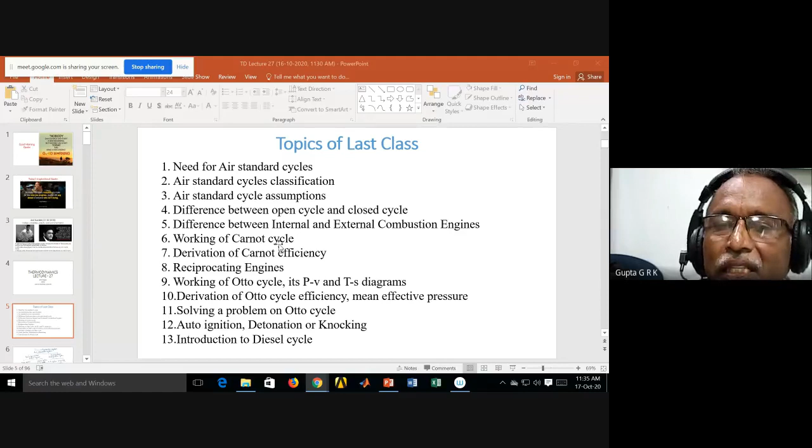We classified the air standard cycles into power cycles and refrigeration cycles. In the power cycles, we have gas cycles and vapor cycles. In the gas cycles, we have many cycles like the Otto cycle, diesel cycle, Brayton cycle, Stirling cycle, Ericsson cycle, Atkinson cycle, Lenoir cycle, and so on. These are various gas cycles.

So in power generation, we have gas cycles and then vapor cycles, which we have already discussed, that is the Rankine cycle. In refrigeration cycle, we have air cycle refrigeration and vapor cycles. In vapor cycles, we have vapor compression refrigeration system and vapor absorption refrigeration system. These things we will discuss in R&AC, but vapor compression refrigeration cycle has already been discussed in DME and also in thermodynamics.

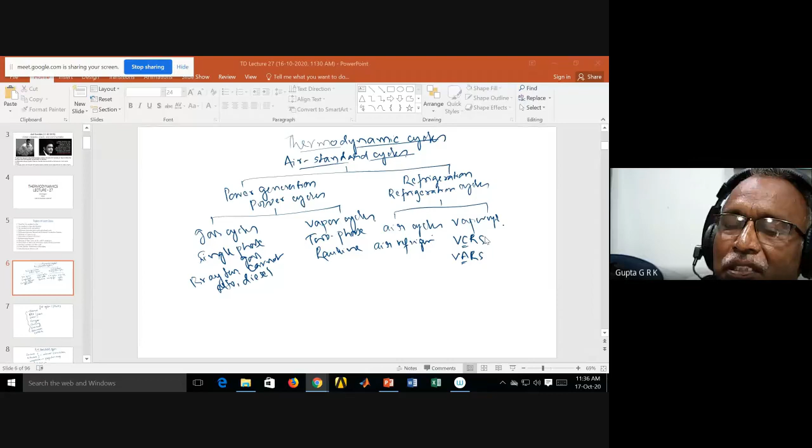So out of these gas cycles, why do we assume air standard cycles? Because there are a lot of problems in practical cycles which we cannot deal with in the early stages. Later, using CFD and other advanced computational technologies, we can analyze them. But for the simple theoretical things, we are happy with approximate solutions. So we make some assumptions.

What makes it complicated is the friction and turbulence, which are reasons for internal irreversibilities. Also composition changes, because combustion takes place inside, and there will be heat losses. So all these things we have to consider when we look at practical cycles, but we take some air standard cycle assumptions, some idealizations.

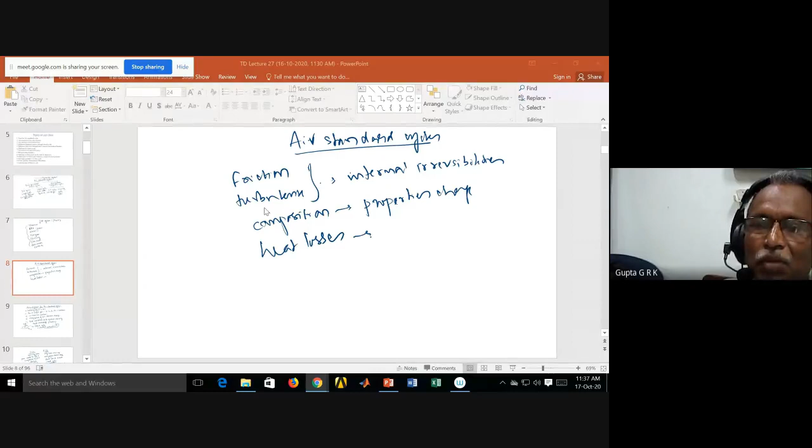So what are the assumptions for air standard cycles? Working fluid is air, and air is taken as a perfect gas, for which Cp, Cv, R, and molecular weight are all constants. We assume there is no chemical reaction, and the composition of air doesn't change. That's why combustion takes place outside, not inside the air. Its composition recirculates.

It is a closed cycle. That's what we call external combustion type, where combustion takes place somewhere else, but only heat is exchanged, from a high temperature reservoir. So this is a closed thermodynamic cycle.

But in reality, these are open cycles. We know that air is taken in and exhaust gases go out. That is an open cycle, where air is not recirculated, and new fresh air is taken in. So we discussed the difference between internal combustion and external combustion: here burning takes place inside the fluid, there burning takes place outside with only heat exchange. Here composition does not change for the working fluid, there composition changes. That's why it is open cycle versus closed cycle.

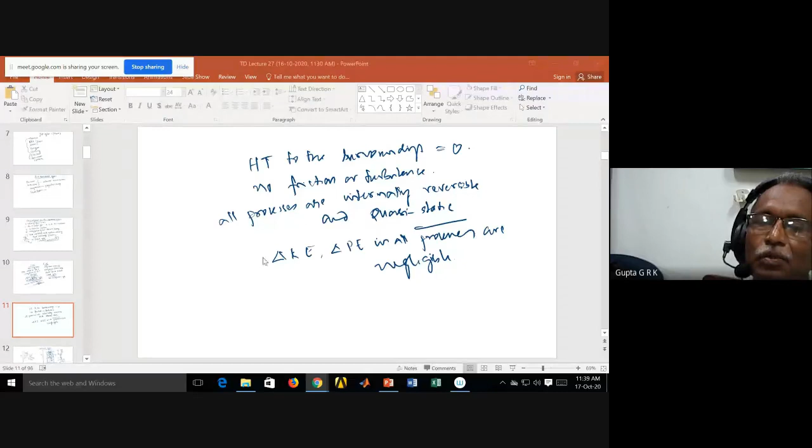Other assumptions include that heat transfer to the surroundings is zero, and there is no friction and turbulence, meaning we assume all the processes to be internally reversible and quasi-static. Also, we assume that change in kinetic energy and potential energy is negligible in all the processes.

So this is the way we have derived the Carnot efficiency. I told you we can do this in terms of pressure ratio, velocity ratio, volume ratio, and temperature ratio, as we have done in the previous chapter.

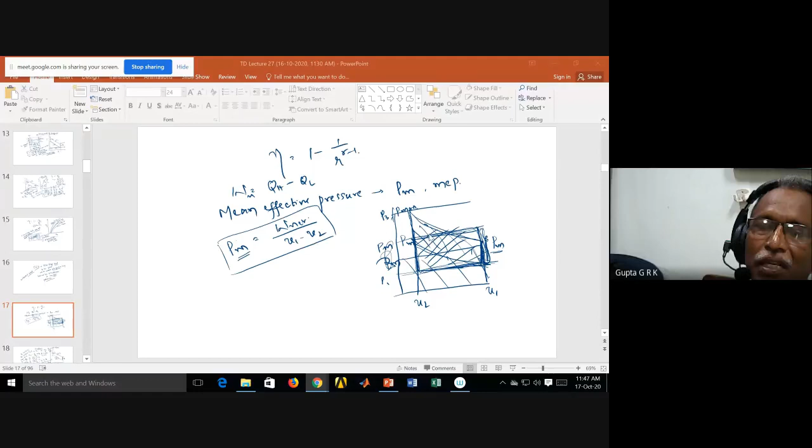This is the efficiency. We define what is called mean effective pressure: for the same distance of the piston, to have the same work, an equivalent pressure acting from beginning to end would produce this much work. That pressure is called the mean effective pressure, which, since area is W net by V1 minus V2, gives the height of the rectangle, which is the mean effective pressure. That is how we define mean effective pressure.

Now I told how to solve a problem of the Otto cycle. You will be given P1 and T1, and you will be given the compression ratio, so you can find V2 by V1. So V2 is obtained, the volume ratio is known, and you can find the pressure ratio and temperature ratio from isentropic relations.

Then you will be given either the maximum pressure or temperature, or you will be given the heat addition. If heat addition is given, constant volume heat addition: Cv into T3 minus T2 equals QH, so I can find T3. If T3 is given, you can find QH. In that way I can find P3, T3, and V3.

Coming here, I know that V4 equals V1. Since V4 is already known, V3 by V4 is known, so you can find T3 by T4 and P3 by P4 using the isentropic ratios again. In that way, I can find all the pressures, temperatures, and specific volumes.

Once I know all of them, I can find out what is the heat lost, what is the heat gain, what is the work done, and the efficiency. All these things I can find out. This is the way I can tackle a problem.

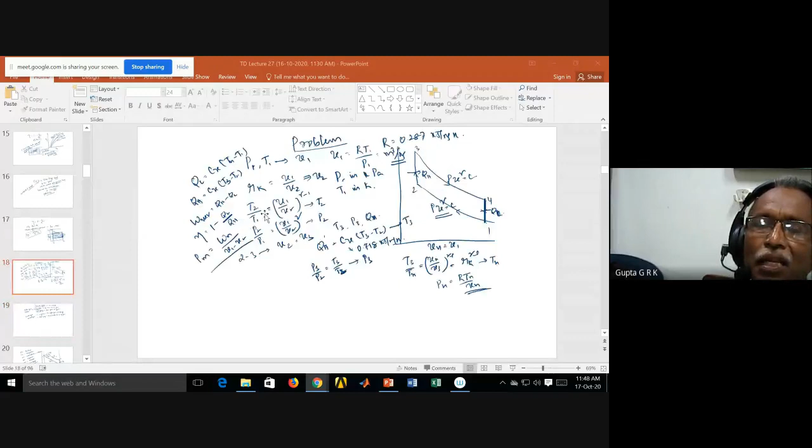If you want higher compression ratios to increase efficiency further, we go for what is called the diesel cycle, where only air gets into the cylinder during suction. It gets compressed. After compression, when the temperatures and pressures are high, we inject the fuel at still higher pressure so that combustion takes place. That is called CI engine, compression ignition.

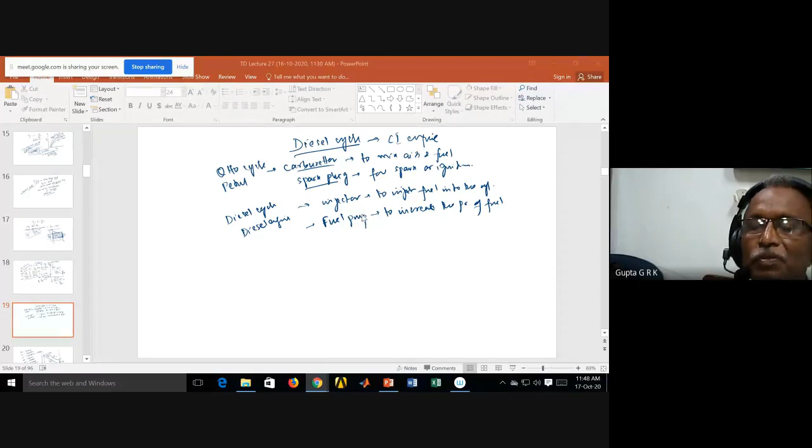Previously, Otto cycle or petrol engine is SI engine. So in Otto cycle, we will have a carburetor and spark plug. In diesel engine, we will have an injector and the fuel pump. So this is about the diesel engine.

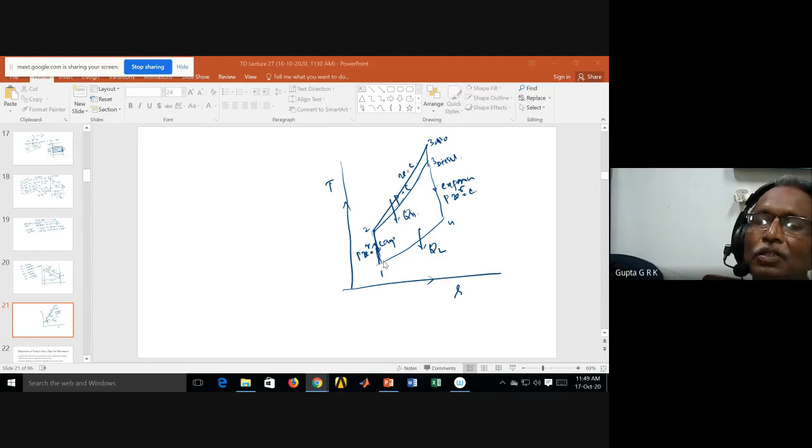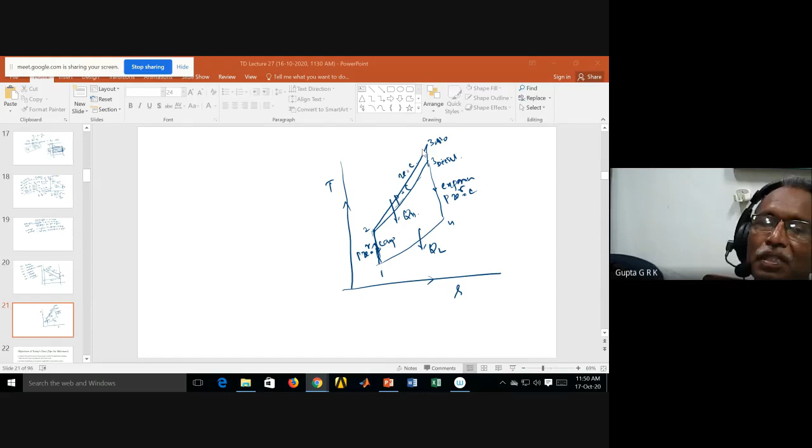If you draw the diesel cycle on a TS diagram, we get this: compression, then constant pressure combustion, then expansion, and the heat release. This is the way it takes place. If it is the Otto cycle, we will have constant volume combustion. You can see that the area of the cycle increases for the Otto cycle, because this has a higher slope. That's what we discussed in the last class.

Today's class we will continue, and derive the expression for diesel efficiency, the diesel cycle efficiency.

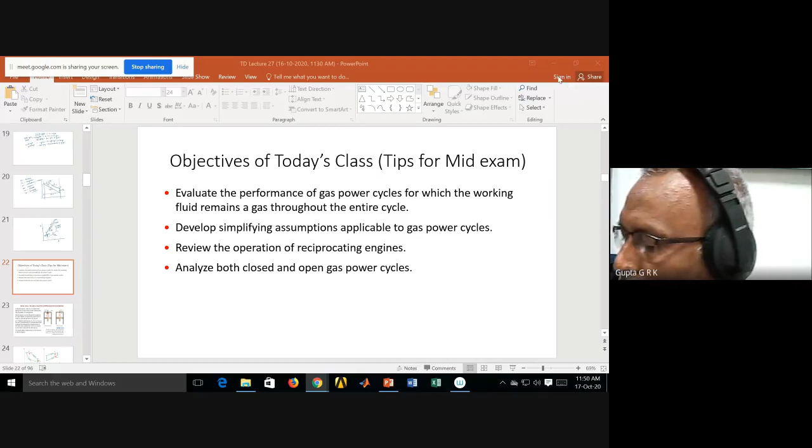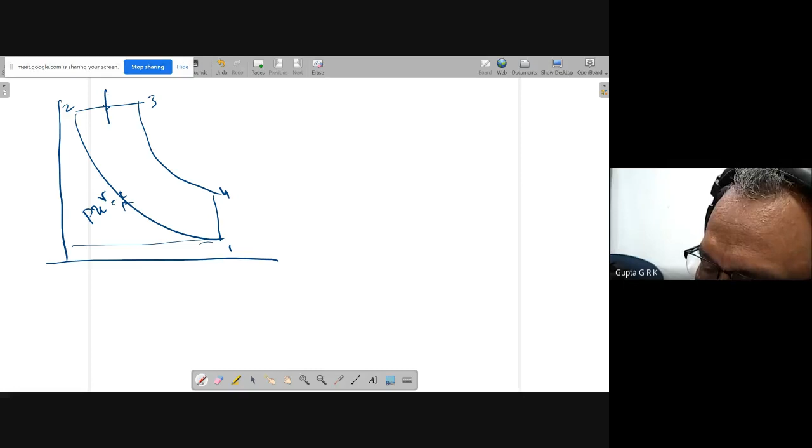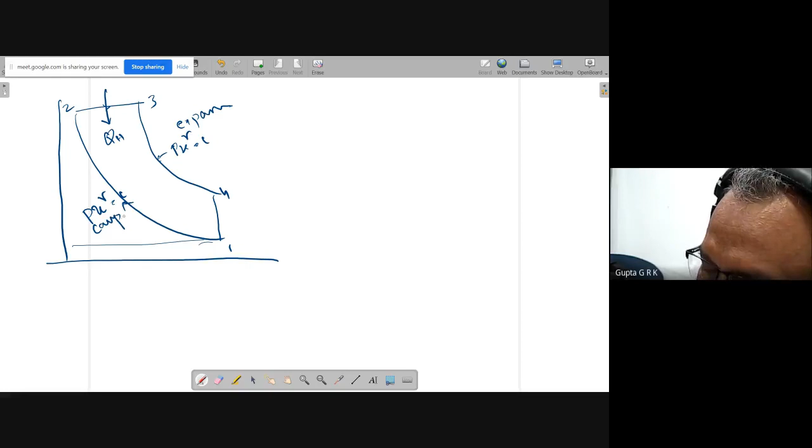So if you draw a diesel cycle, this is PV power gamma. I am not drawing the suction and exhaust strokes because this is a horizontal line, but even if you draw it, it's no problem. 2 to 3 is the combustion, QH, and this is the expansion stroke, PV power gamma equal to constant. This is compression, and 4 to 1 is the release, QL. So this is the cycle.

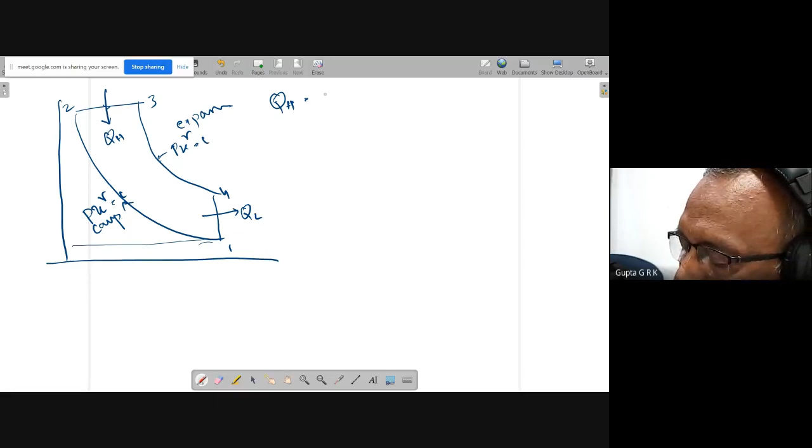So if we want QL and QH: QH is equal to, because this is constant pressure heat addition, Cp into T3 minus T2. And QL, because it is constant volume heat rejection, Cv into T4 minus T1. So efficiency is equal to 1 minus QL by QH, which equals 1 minus Cp into T3 minus T2 by Cv into T4 minus T1.

Cp by Cv is gamma, so I will write this as 1 minus T1 into T3 by T1 minus T2 by T1, all by gamma, times T1 into T4 by T1 minus 1. This T1 cancels off. So I want T3 by T1, T2 by T1, T4 by T1, all those things in terms of the parameters.

So the parameter V1 by V2 is equal to the compression ratio. That's why T2 by T1 is equal to V1 by V2 to the power of gamma minus 1, that is Rk power gamma minus 1.

And then there is another ratio defined, called the cutoff ratio, because it is cut off at point 3. So V3 by V2 is equal to Rc, this is called the cutoff ratio. From 3 to 4 it is expansion, so we write it as Re expansion ratio, V4 by V3. So this is cutoff.

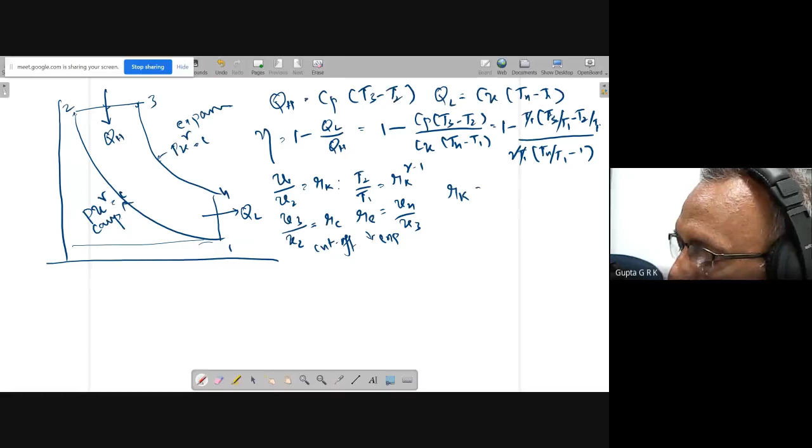This is expansion. So we define 3 ratios: compression ratio, V1 by V2; cutoff ratio, V3 by V2; and expansion ratio, V4 by V3. The total compression ratio is equal to the product of the cutoff ratio and expansion ratio, because the whole volume ratio equals the partial volume ratio times another partial volume ratio: Rk is equal to Rc into Re. Now I want to express them in terms of the temperature ratios.

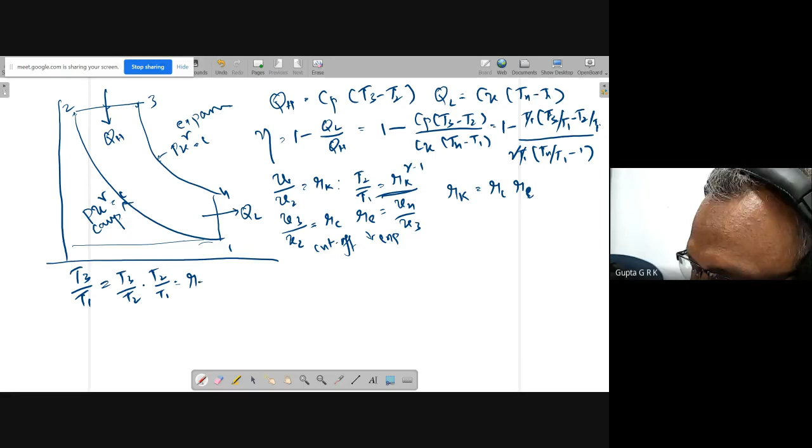So if you take T2 by T1, it is already Rk power gamma minus 1. If I want T3 by T1, it is equal to T3 by T2 into T2 by T1. So T3 by T2 is V3 by V2, and V3 by V2 is Rc, and T2 by T1 is Rk power gamma minus 1.

So I write like this. And I want T4 by T1. So T4 by T1 is equal to T4 by T3 into T3 by T1. And T4 by T3 is V3 by V4 to the power of gamma minus 1. So V3 by V4 is 1 by Re, to the power of gamma minus 1.

And Re is equal to Rk by Rc. So I substitute that, so this is equal to Rc by Rk to the power of gamma minus 1, into Rc, Rk power gamma minus 1. So you can see that Rk power gamma minus 1 and Rk power gamma minus 1 goes off, and Rc power gamma minus 1 into Rc is equal to Rc power gamma.

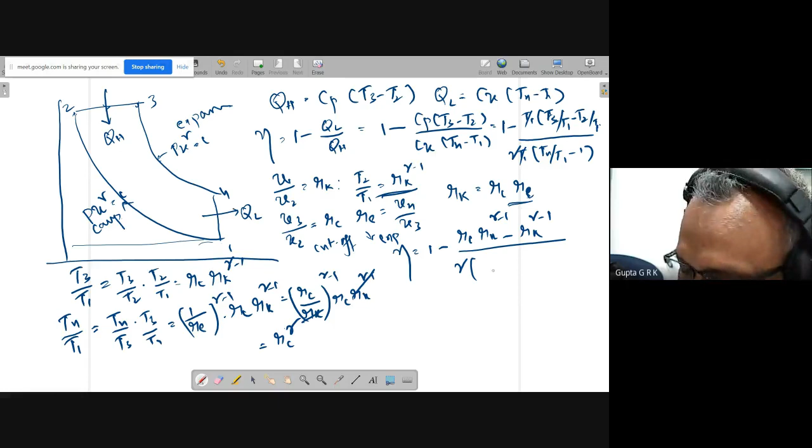Okay, so all these things I get, I substitute there. So eta is equal to 1 minus T3 by T1, which is Rc, Rk power gamma minus 1, minus T2 by T1, which is Rk power gamma minus 1, by gamma. T4 by T1 is Rc power gamma, minus 1. Like this we get.

Sir, gamma should be in the numerator? Gamma should be in the denominator only. Cp in the numerator, Cv in denominator. No, I've written it wrong actually, everything is wrong, I have done it in reverse. Actually QL by QH, 1 minus QL by QH, I have written QH by QL, it becomes reverse, sorry.

So it will become 1 minus gamma into Rc power gamma minus 1 by Rc, Rk power gamma minus 1, minus Rk power gamma minus 1. Actually this is inversed, okay, I have written QL by QH here, but when writing QH, I have given it in the numerator and QL in the denominator. Sir, is it okay, gamma should be in denominator? Gamma should be in the denominator. Okay, this is how it happens.

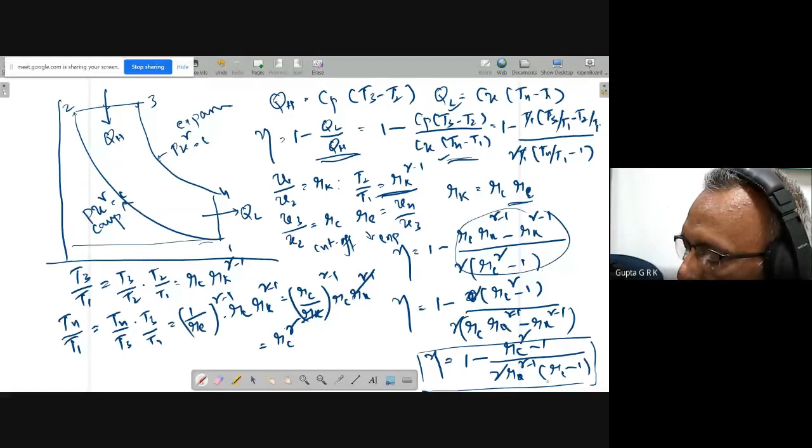So this eta is equal to 1 minus Rc power gamma minus 1 by gamma Rk power gamma minus 1, if I take common, into Rc minus 1. Okay, this is the efficiency. Eta is equal to 1 minus Rc power gamma minus 1 by gamma Rk power gamma minus 1 into Rc minus 1. Okay, this is the efficiency of diesel cycle. I will write again.

So this is the efficiency of the diesel cycle. And again, here also you can find out the mean effective pressure. Mean effective pressure is equal to W net by V1 minus V2. And W net is equal to QH minus QL. Okay, it is only a formula. If somebody asks you to derive, you have to derive it.

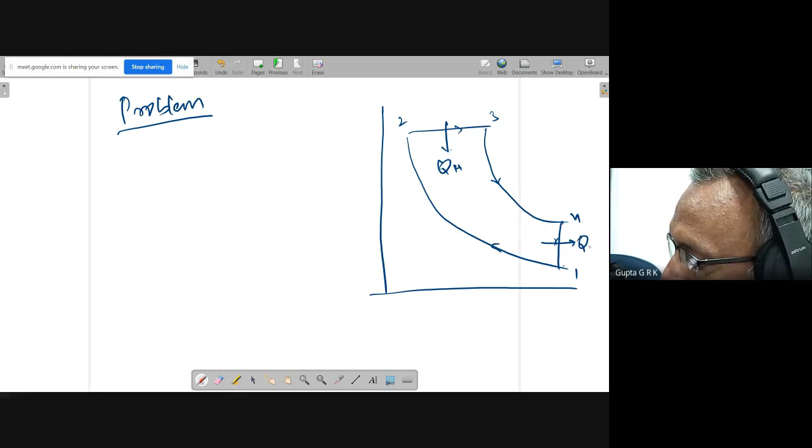Otherwise, you don't need to remember the formula. Only you have to do is just go point to point and find out pressure, volume, and temperature, and find out QH, QL, and W net, like this. So just for example, if you are given a problem, okay, you will be given P1 and T1, so you can find out V1.

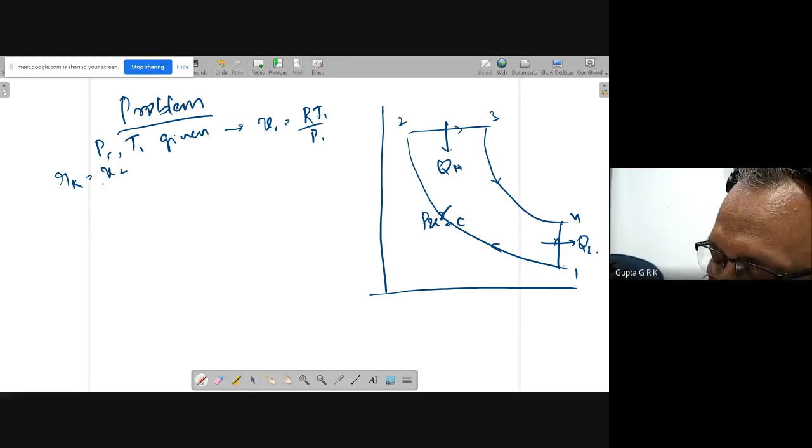Okay, and to get point 2, I know the process, so you'll be given compression ratio, that is equal to V1 by V2, which gives me V2. Okay, this is given again, so V2 I got. So T2 by T1 is equal to Rk to the power of gamma minus 1, and P2 by P1 is equal to Rk to the power of gamma. So I can find out T2. So all the values at point 2 I got.

So for getting point 3, again, you may be given cutoff ratio. If cutoff ratio is given, I can get which is called V3 by V2, so from V2 I can get V3. And once you get V3, then you can get V3 by T3 is equal to V2 by T2.

Because it is a constant pressure relation, I can get T3 from here. And anyhow, P2 equal to P3, so I know all the values. Once I know, I can find out QH. QH is equal to Cp into T3 minus T2.

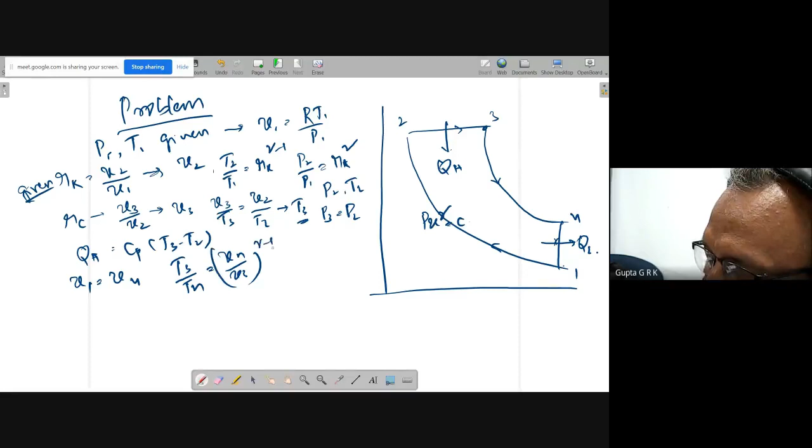And then I have to get point 4. So anyhow, V1 equal to V4, I know it. And so I know V3 and V4. V3 already calculated, V4 is known. So from 3 to 4, I can get T3 by T4 is equal to V4 by V3 to the power of gamma minus 1. This gives me T4. So I got all the temperatures, and so QL is equal to Cv into T4 minus T1.

So I got QH, QL, so W net is equal to QH minus QL. And efficiency is equal to 1 minus QL by QH, and mean effective pressure is equal to W net by V1 minus V2. So in this way, I can finish the problem.

Any questions? Data may be given in different ways sometimes. Here, instead of compression ratio, I may be given what is the maximum pressure after the compression, so P2 may be given. And from that, I have to find out P2 by P1, which gives T2 by T1 and V2 by V1 again from the isentropic ratios.

So like that, here also QH may be given to you instead of cutoff ratio. So if QH is given, first you calculate T3, and then this ratio T3 by T2 will give me pressure ratio and volume ratio. So that is the way I have to go about based on the data of the problem. Any doubts?

Just go point by point, get all P1, V1, T1, P2, V2, T2, P3, V3, T3, like that. First you understand that, how to get them, and then you can get all QH, QL, W net, efficiency, and mean effective pressure. Is that okay?

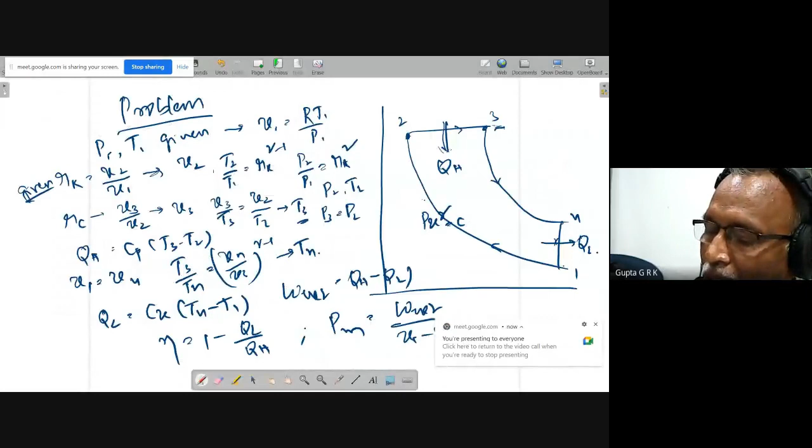Okay, then actually, if you see the practical cycles, mainly for diesel cycle, diesel engine.

So normally what we do is, we don't inject the fuel after the compression, because there will be what is called as injection delay. So if I start injecting after the compression, because it takes some time, and the combustion starts late, and I lose the power stroke. So because of that, we start injecting the fuel before compression is completed. But not too much early, because again the combustion may take place and it may obstruct the piston motion. So there will be a calculated amount of early injection I do.

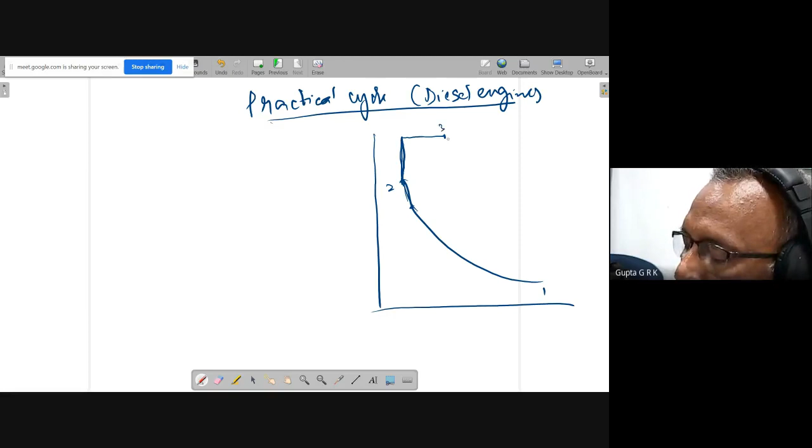So what happens is, I start injecting fuel here itself, so that the combustion takes place exactly like Otto cycle, it starts here. So this is 1 and this is 2. Some part there will be constant volume combustion, and it is injected further up to some point, cutoff. So this is constant pressure combustion.

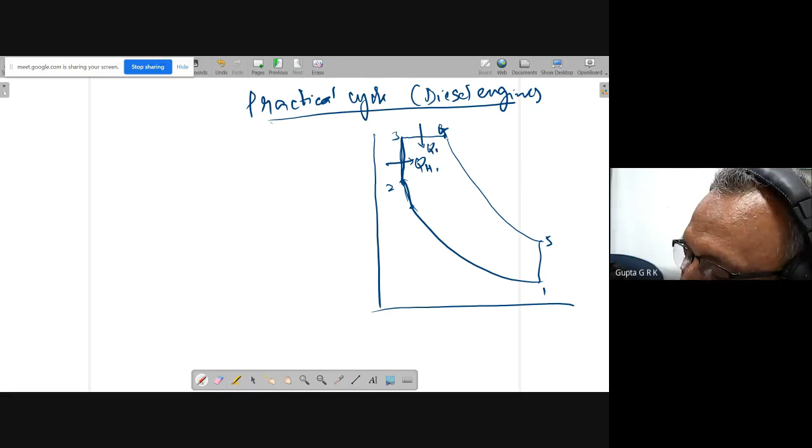There will be both constant volume combustion and constant pressure combustion, and the remaining thing will be same. This is 3 I will put, and 4 I will put here, 5. So this is QH1 and this is QH2, and this is QL. So this is the way. This is called as, there are different names for this: dual cycle, sometimes people call it limited pressure cycle, and some more people call it mixed cycle.

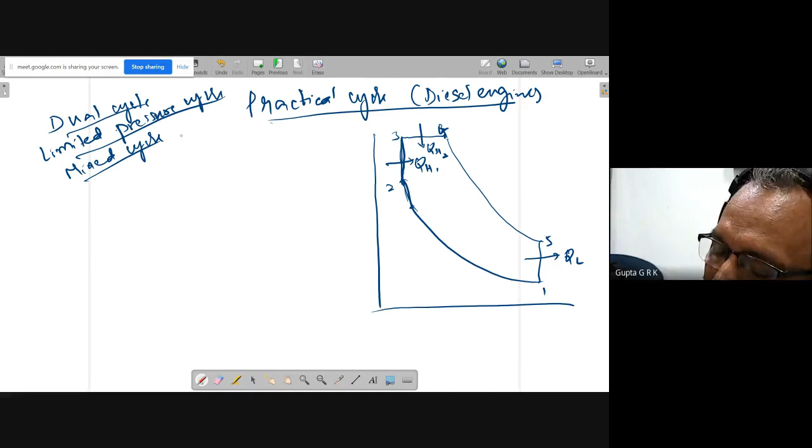All of them mean the same. And normally all high-speed diesel engines follow dual cycle. So this is the practical cycle, and we have constant pressure combustion partially and constant volume combustion, both of them partially. So there will be heat addition in the constant volume and then in constant pressure. The remaining things same: we will have suction stroke, compression stroke, and constant volume combustion, constant pressure combustion, then expansion, and then release, and then exhaust, like this. Okay, this is the way it takes place.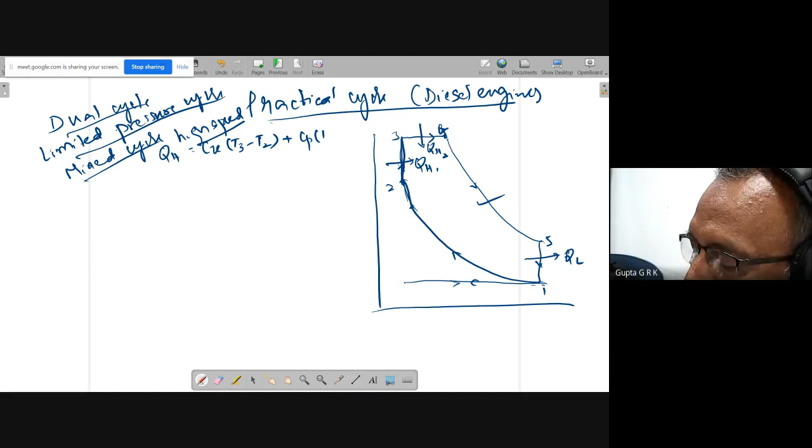And so we will have QH. Suppose if you take QH, this is equal to, first here, constant volume combustion, I will have Cv into T3 minus T2, plus Cp into T4 minus T3. And QL will be again constant volume release, so Cv into T5 minus T1. So this is 5.

So now again, eta equal to 1 minus QL by QH. So that is 1 minus Cv into T5 minus T1 by Cv into T3 minus T2 plus Cp into T4 minus T3, like this. So again, we do the same exercise as we have done. So Cv here gets cancelled, and here I will put gamma by dividing Cv in both numerator and denominator. And again, I can divide both numerator and denominator by T1. So 1 minus T5 by T1 minus 1 by T3 by T1 minus T2 by T1 plus gamma into T4 by T1 minus T3 by T1. Okay, so this is the way.

And same way we'll do T2 by T1. We know that this is Rk to the power gamma minus 1, where Rk is V1 by V2.

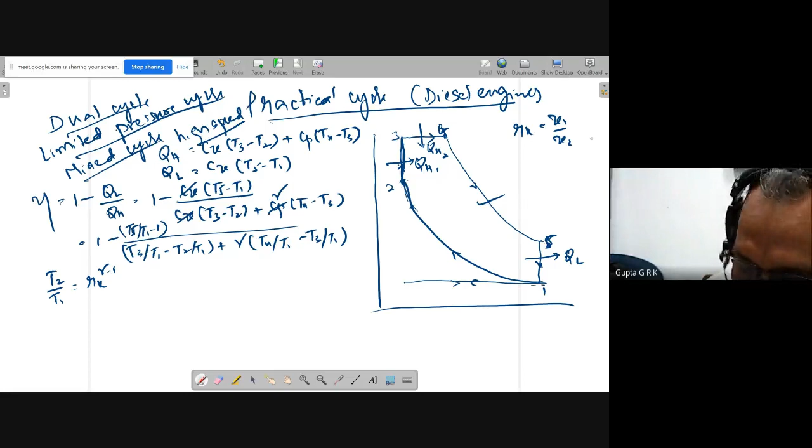Okay, so P3 by P2 is equal to T3 by T2, which is equal to Rp. So T3 by T1 is equal to T3 by T2 into T2 by T1.

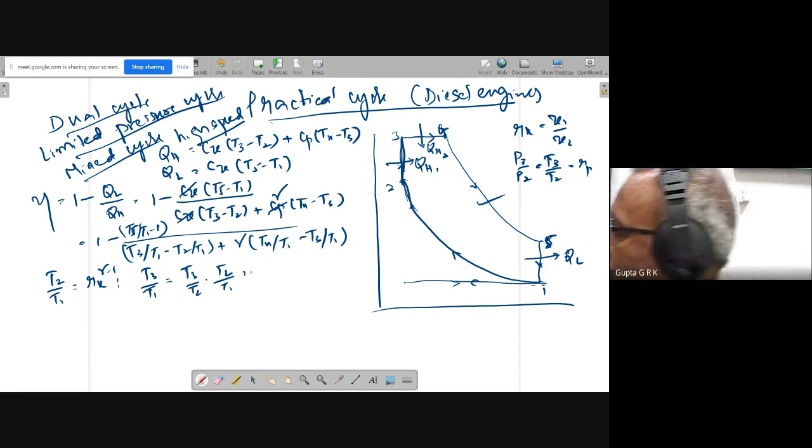So T3 by T2 is Rp, and T2 by T1 is Rk to the power gamma minus 1. Now taking T4 by T1, T4 by T1 is T4 by T3 into T3 by T1. And what is T4 by T3?

V4 by V3 is cutoff ratio, right? So this is also equal to T4 by T3. So T4 by T3 is cutoff ratio, Rc, and T3 by T1 is already there, Rp into Rk to the power gamma minus 1.

Then coming to T5 by T1, T5 by T1 is T5 by T4 into T4 by T1, and T5 by T4 is V4 by V5 to the power of gamma minus 1, which is again the expansion ratio, right?

So expansion ratio, we can write like this, okay? So into T4 by T1 is Rc, Rp, Rk to the power gamma minus 1. So this is equal to, and Re is equal to Rk by Rc.

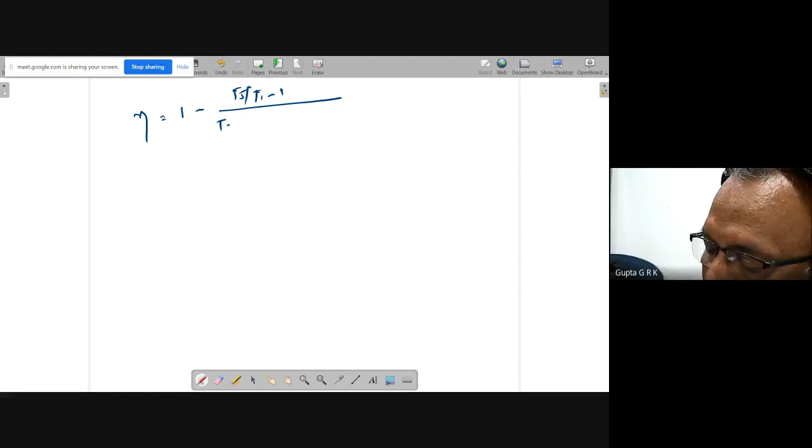Okay, so if you substitute, you will get the final relation. So which is actually 1 minus T5 by T1 minus 1 by T3 by T1 minus T2 by T1 minus T4 by T1 minus T3 by T1.

So substituting all the previous expressions, T5 by T1 is Rp, Rc to the power gamma minus 1, by T3 by T1 is Rp, Rk to the power gamma minus 1, plus minus Rk to the power gamma minus 1, minus T4 by T1 is, gamma is there here, gamma Rc, Rp, Rk to the power gamma minus 1 minus Rp, Rk to the power gamma minus 1.

Okay, this is the way we get it. So this is equal to 1 minus, if you see, okay, 1 minus Rp, Rc to the power gamma minus 1, by, in the denominator, Rk to the power gamma minus 1 I can take common, Rk to the power gamma minus 1 into, so here what is left is Rp and minus 1.

Minus, here if I take gamma, Rp into, okay, gamma, Rp also I can take common, so it is Rc minus 1. Okay, so this is the way I get it.

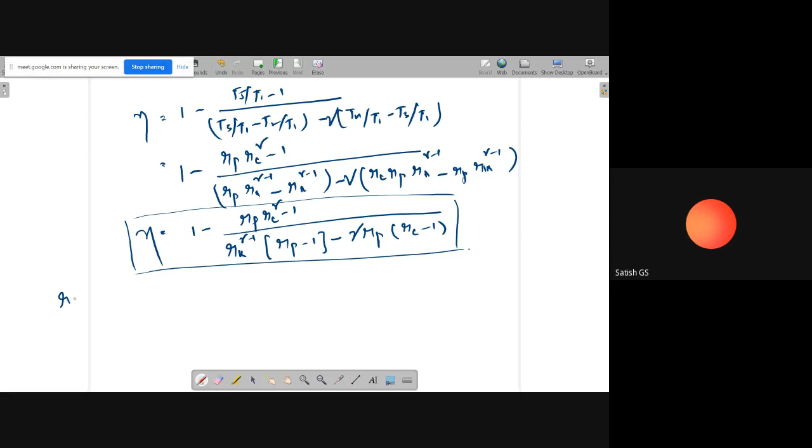So we can check whether this is right or not. So if I take Rp equal to 1, yes, Rk to the power gamma minus 1 is for the whole denominator. Rk power gamma, yeah, that is right. Like this. Is it okay now?

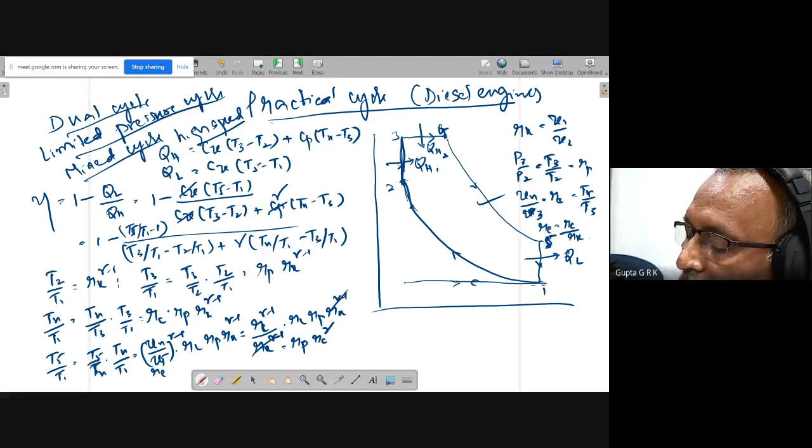Yes sir, I think it's okay. So if Rp equal to 1, that means this constant volume process is not there, so P2 equal to P3. So then what happens? It becomes a diesel cycle. It should become a diesel cycle.

So eta equal to 1 minus Rc power gamma minus 1 by this, Rp minus 1 will become 0, and we will get gamma Rk power gamma minus 1 into Rc minus 1. Okay, this becomes like this, which is a diesel cycle.

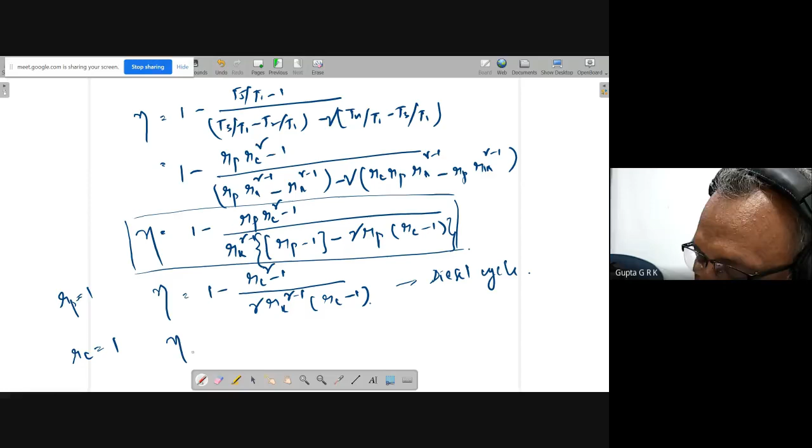In the same way, if I take Rc equal to 1, then it becomes the Otto cycle. So if Rc equal to 1, it becomes 1 minus Rp minus 1 by Rk power gamma minus 1 into Rp minus 1 minus, I think that's all, because the next term becomes 0. So Rp minus 1 cancels. It will become 1 minus 1 by Rk power gamma minus 1, which is the Otto cycle.

So like this, we can check whether our expression is right or not. Okay, so this is the dual cycle.

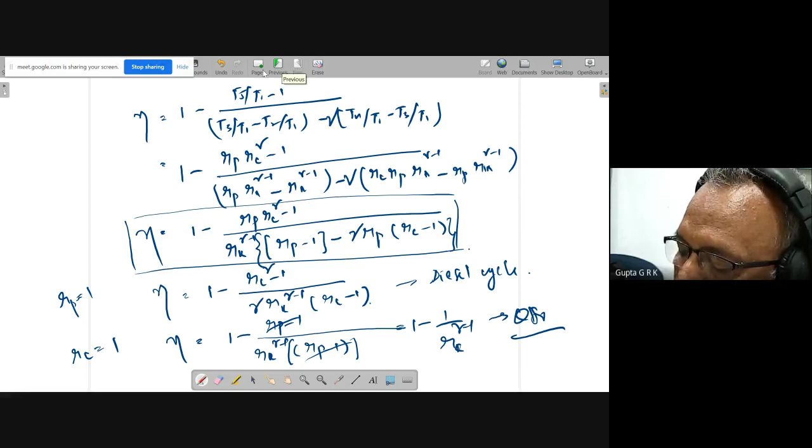So here also we can solve the problem in the same way. So if I have points one, two, three, 4, 5, PV power gamma equal to constant, V equal to constant, and here V equal to constant, PV power gamma equal to constant.

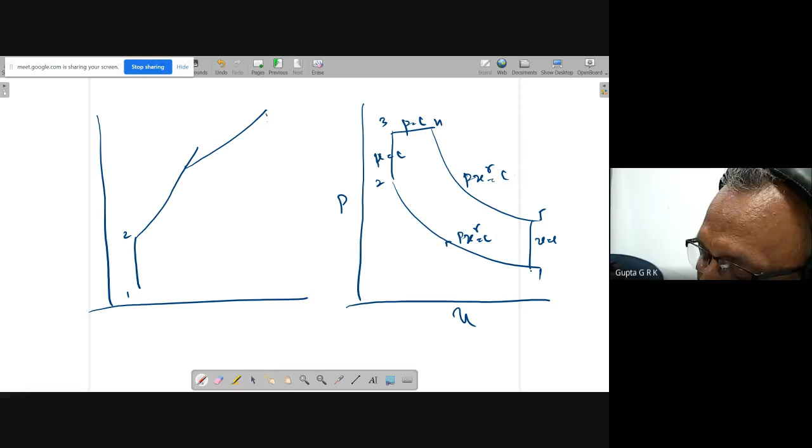And actually we can draw the TS diagram also. This is PV diagram, so TS diagram, 1, 2. So there will be constant volume combustion, more volume slope, and somewhere here it stops, and constant pressure combustion, and then isentropic expansion, and it goes like this. 3, 4, 5, and this is QH1, and this is QH2. This is V equal to constant, this is P equal to constant, here V equal to constant. So this is QH1, this is QH2. So like this, we will have the cycle on TS diagram and PV diagram.

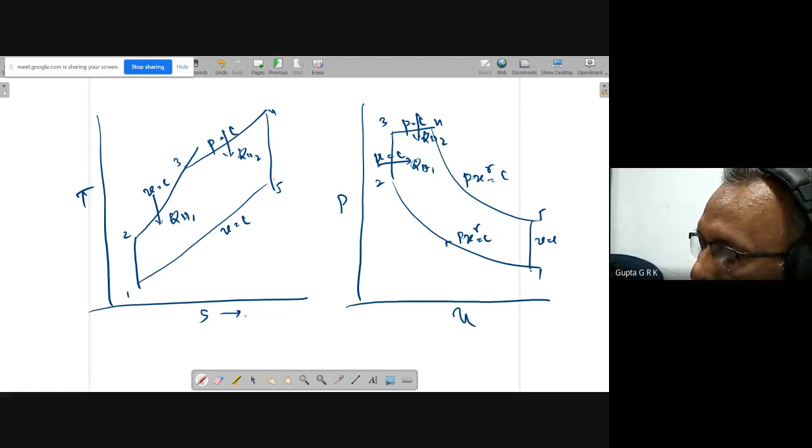So again, if you are given a problem, you will be given P1, T1 gives V1, and for getting T2, you will be given RK. So you will get V2 and then T2, and to get point 3, you will be given either the maximum pressure or QH, P3 or QH or T3, whatever it is. One of them will be given to you. So if T3 is given, you can find T3 by T2 and V3 by V2, and QH also is equal to CV into T3 minus T2, you can find out.

And for this you will be given data. And for point 4, you will be given either cutoff ratio or you may be given QH2. So one of them will be given to you. So using that, I can find point 4. And for point 5, I need not know anything, because V1 equal to V5. And because all properties at 4 are known, I can find all values at 5. In that way, I can find out.

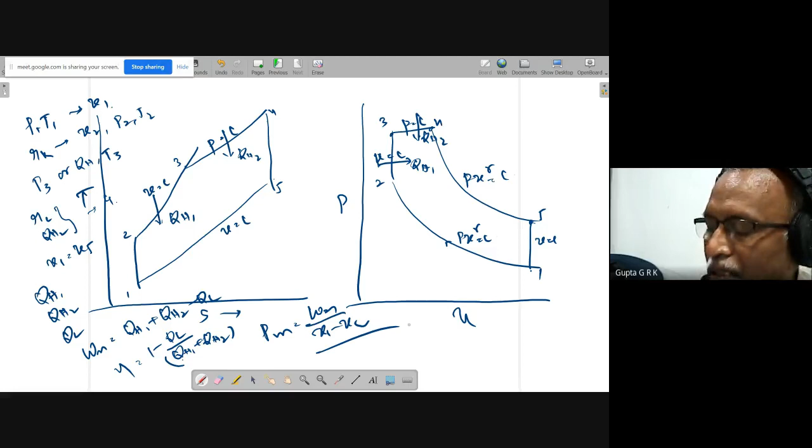Then again, you can find out QH1, QH2, QL, and W net is equal to QH1 plus QH2 minus QL, and efficiency is equal to 1 minus QL by QH1 plus QH2, and PM is equal to W net by V1 minus V2. So just like that, we go by sequence, and because to get every point, the next point, I have to have some data. Using that, I have to continue. Like that, I can solve the dual cycle relations or problem. Is that okay?

Heat rejection is at constant volume for all the cycles, for Otto cycle, diesel cycle, and dual cycle also. Now you can see when I compare these 3 cycles.

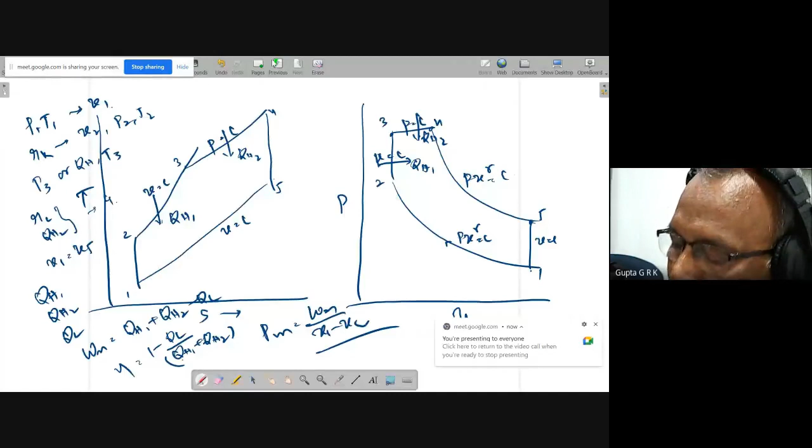Comparison of Otto, diesel, and dual cycles, to see which has more efficiency. And as I told, it depends on the compression ratio sometimes. So if only compression ratio, we know that Otto cycle is more efficient compared to diesel cycle. But sometimes if the maximum pressure or temperature is the limit, then the reverse happens. We will see how it happens anyhow. So if I fix compression ratio, that is for the same compression ratio.

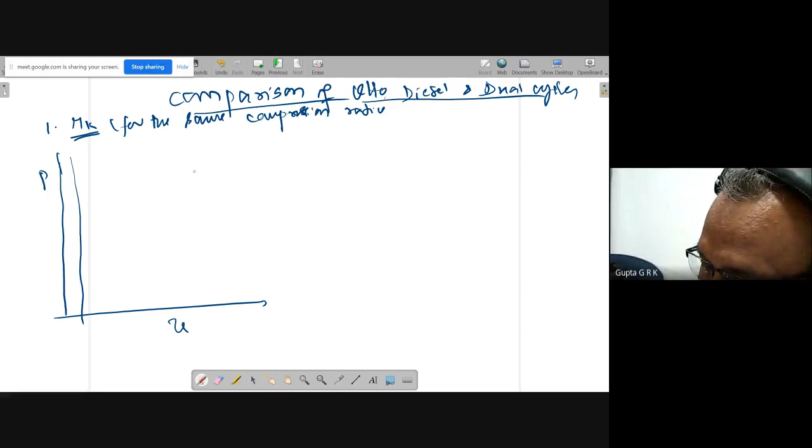So if I draw the PV diagram, compression ratio fixed means the volumes are fixed here. This is fixed. And 1 to 2 is like this. And so here, if it is constant volume combustion, it goes like this. And if it is constant pressure combustion, it goes like this. If partially constant volume, constant pressure, it goes like this. And I will number them in some way.

Dual cycle, I will put 1, 2, 3, 4, 5. This is dual fuel, dual cycle: 1, 2, 3, 4, 5, 1. And if I number this as 6: 1, 2, 6, 5, 1, Otto cycle. And if I name this as some 7: 1, 2, 7, 5, 1, this is diesel cycle.

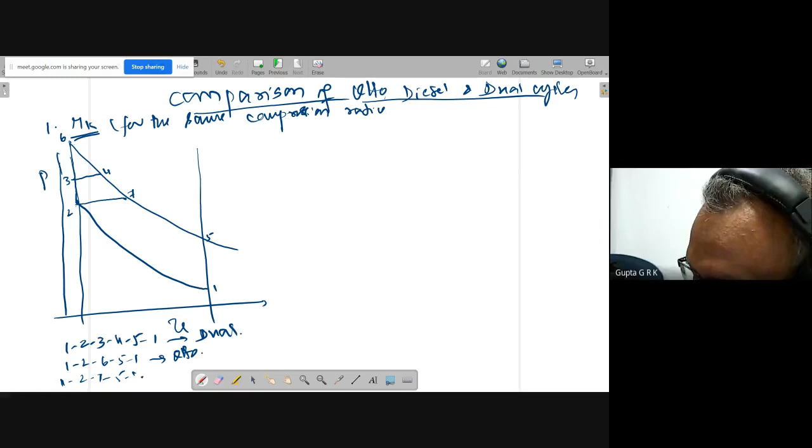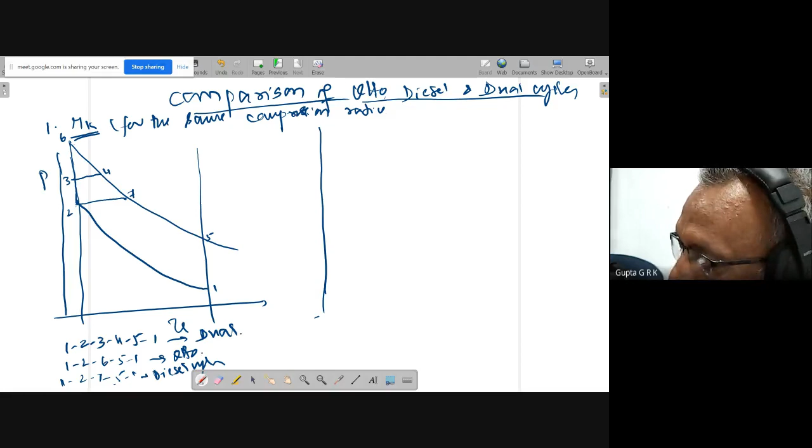Okay, so this is the way we get it. And you can see by seeing this, which gives me more work. So Otto cycle will have more area, diesel cycle will have somewhat less area, and dual cycle will have medium area, and diesel cycle will have less area. And if you see the TS diagram, whatever is asked, is heat rejection the same?

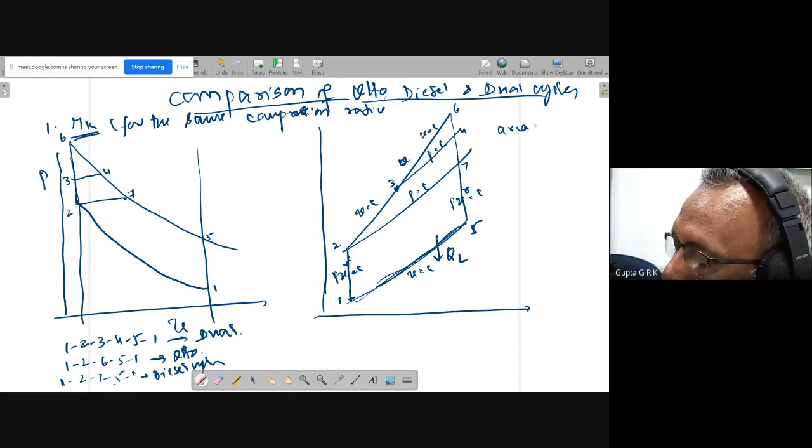QH is different. QH for Otto cycle is the maximum because it is below 2-6. The area under 2-6 is the Otto cycle QH. This is the area under 2-7, diesel cycle. And the area under 2, 3, 4, that is the dual cycle.

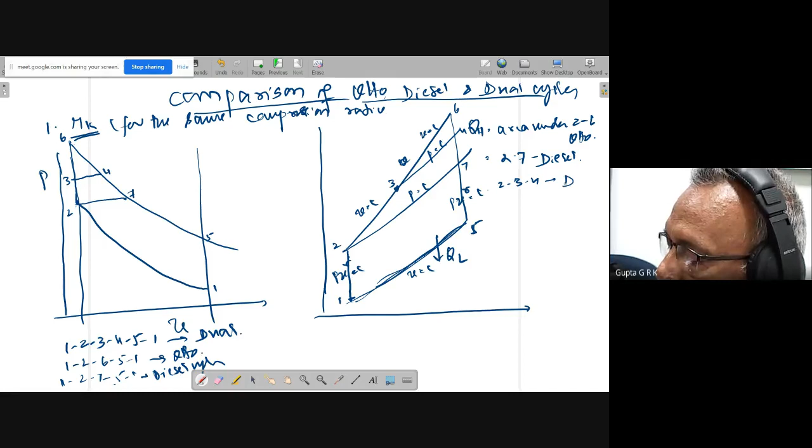This shows that efficiency of Otto cycle is greater than efficiency of dual cycle, which is greater than efficiency of diesel cycle. For this particular case, where compression ratio is taken to be same, I can draw the PV diagram and TS diagram and show that the area of the cycle is in this order. So the other case we'll consider.

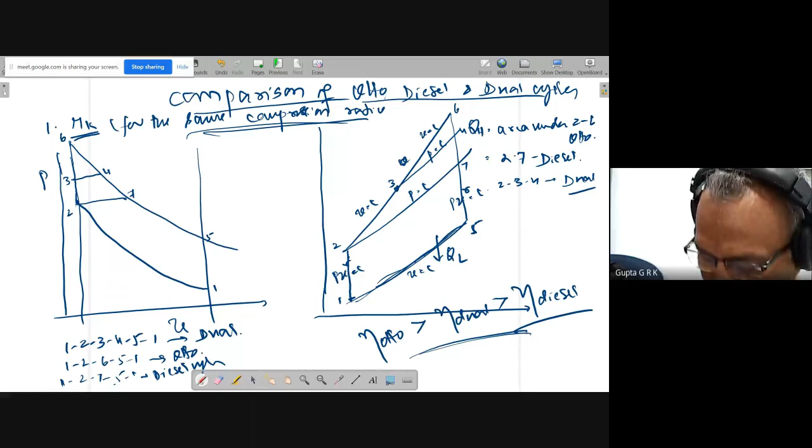So for the second case, same maximum pressure and temperature. Maximum pressure and temperature are same. Okay, so if this is the case...

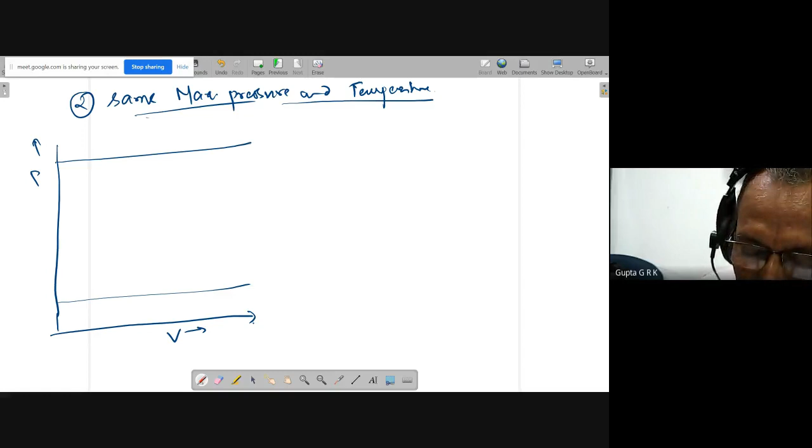Minimum pressure is here, maximum pressure is somewhere here, suppose. If this is 1, the compression takes place like this. And if it is diesel, it becomes like this. But for Otto cycle, I cannot have this complete combustion, because then the pressure goes still up. So I have to stop somewhere here. So this is 6 and this is 7, right? And the dual cycle is in between these two.

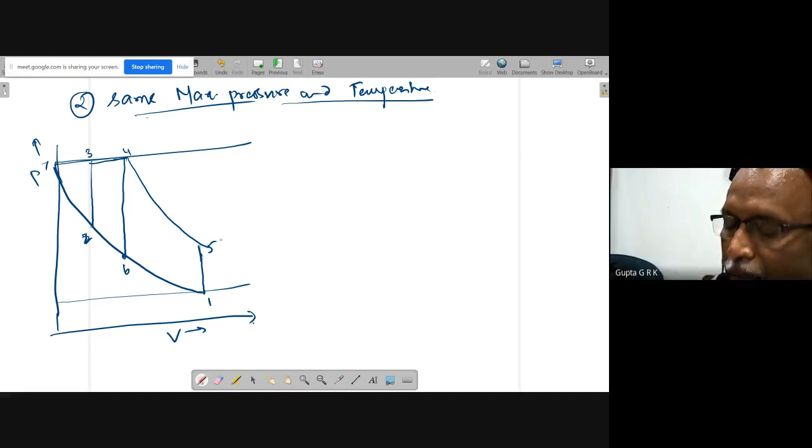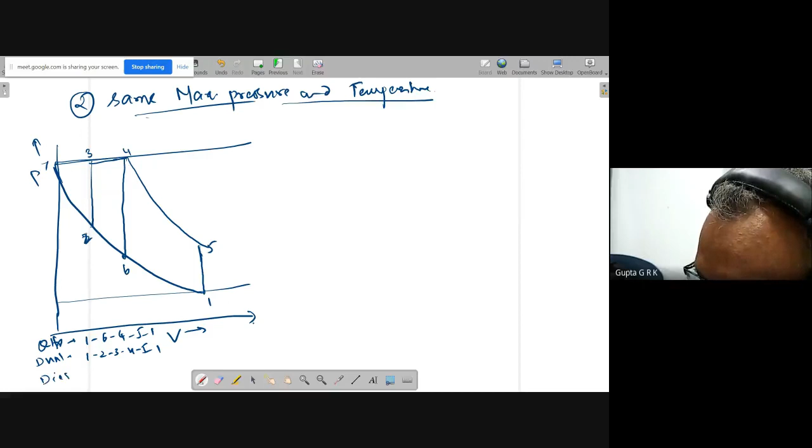It becomes like this. So you can see Otto cycle is 1, 6, 4, 5, 1, and dual cycle is 1, 2, 3, 4, 5, 1, and diesel cycle is 1, 7, 4, 5, 1. I think you can understand that. So the maximum pressure is fixed, right? So in this way we will get it.

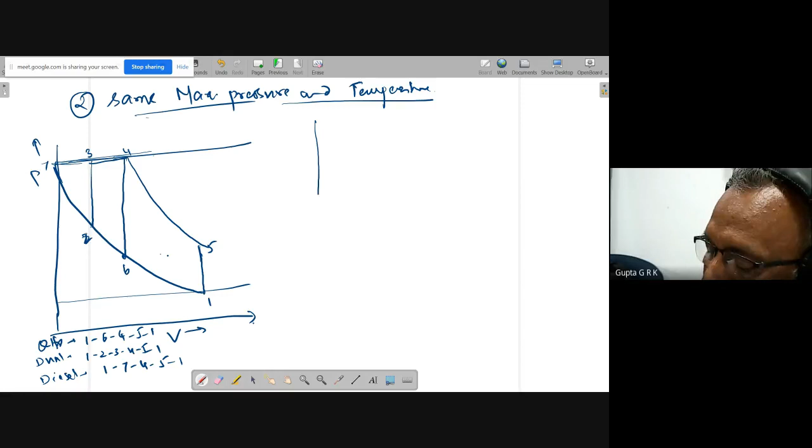So if you see the whole areas, diesel cycle will have the maximum area, dual cycle in between, and Otto cycle will have the minimum area. So if I draw them on a TS diagram... because the diesel cycle can go for more, yes.

So diesel cycle goes up to here, dual cycle goes up to here. So here this is 2 and this is 3. Okay, like this.

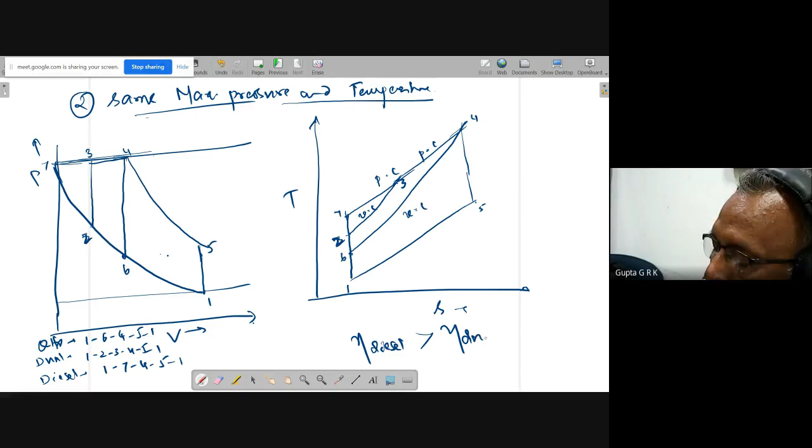So this Otto cycle will go only up to some pressure ratio. It cannot go further because of the temperature limit. Here it can go to high pressure and high temperature for the diesel cycle, and the dual cycle comes in between. This is P equal to constant for diesel, and dual cycle P equal to constant. So you can see, comparing both of them, diesel cycle will have maximum efficiency, more than dual cycle, and dual cycle is more than Otto cycle.

That's why some people ask which cycle is more efficient. You cannot just say Otto cycle or diesel cycle, you have to ask under what conditions. So if it is for the same compression ratio, Otto cycle is more efficient. If it is for the same maximum pressure and temperature, then diesel cycle is more efficient. But Otto cycle cannot go to that maximum pressure and temperature because of auto ignition, so that's why its pressure ratio is less.

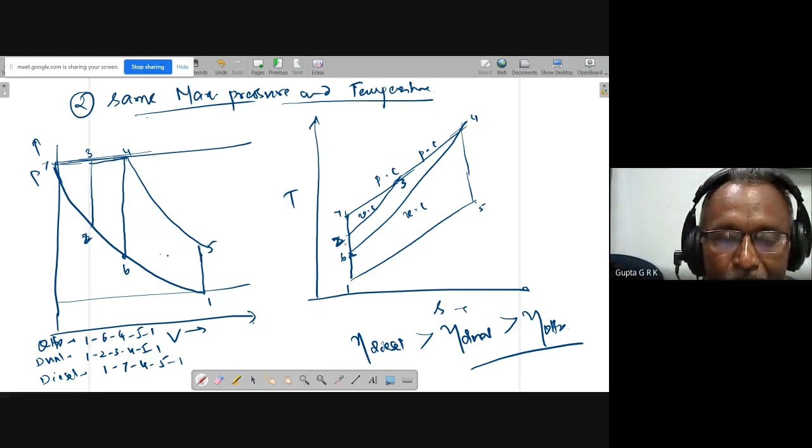So you can see, from 1 to 6 only the pressure ratio goes up. It cannot go further up because of auto ignition. So this is the way we have to compare the cycles. Is it okay? Okay, sir.

Next class we'll go to the other cycles. There are many cycles, like special cycles, the Lenoir cycle, where I have only 3 processes. And there are 2 more cycles which have equal efficiency as the Carnot cycle. I named them once, Stirling cycle and Ericsson cycle. So Ericsson cycle, I talked about it: when you have infinite number of intercoolers and reheaters in a Brayton cycle, it approximates to the Ericsson cycle, which has Carnot efficiency. We will discuss those in the next class.

You should be able to solve Otto cycle, diesel cycle, or dual cycle problems based on the things I told you. So you can go through either Cengel or Pulkrabek to understand how to solve the problems. Okay, if everything is okay, we will go to the next story.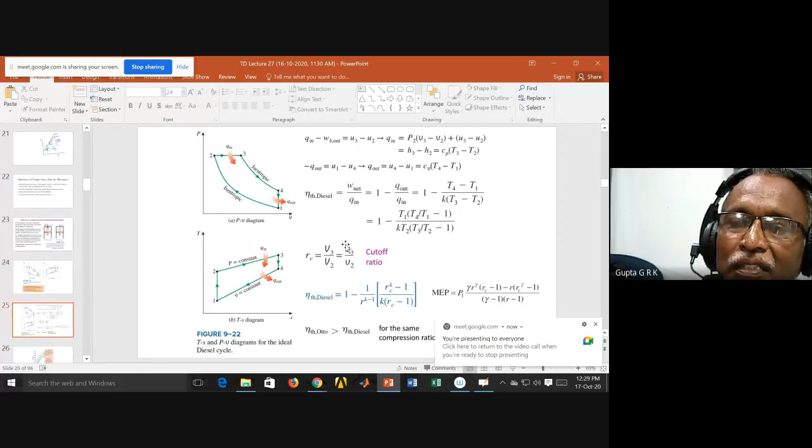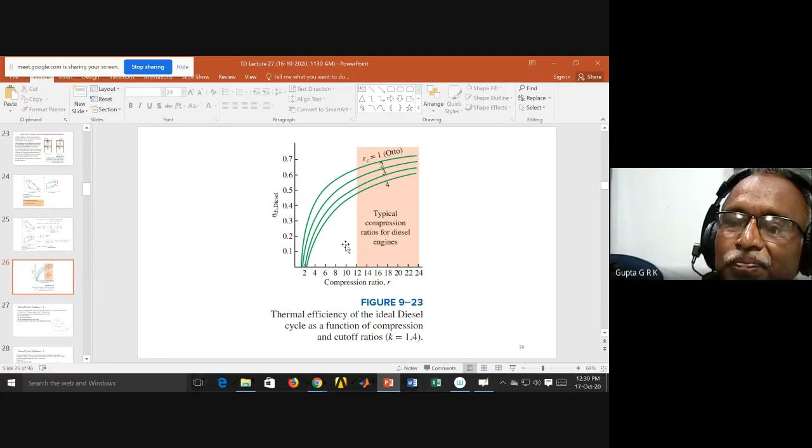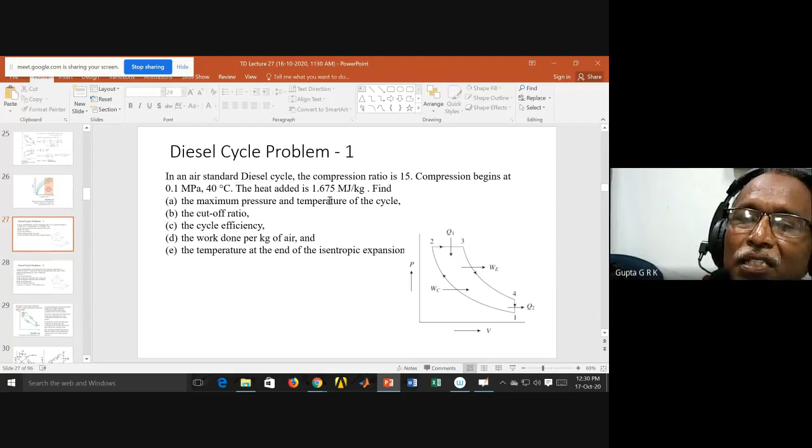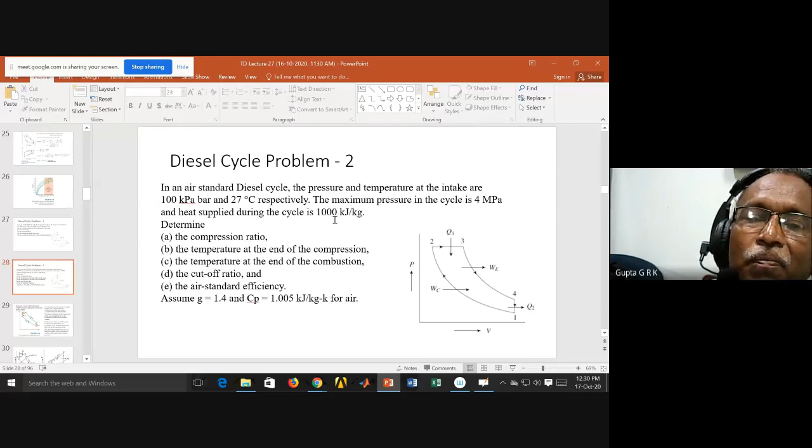And for the diesel cycle problem, how to solve it, I have given some examples. This is the way you will get the data. As I told, in the first problem you are given P1, T1, compression ratio, and heat added, so in that way you can find out all the other things. In the second problem, you are given P1, T1, and the maximum pressure instead of compression ratio, and heat supplied QH is also given.

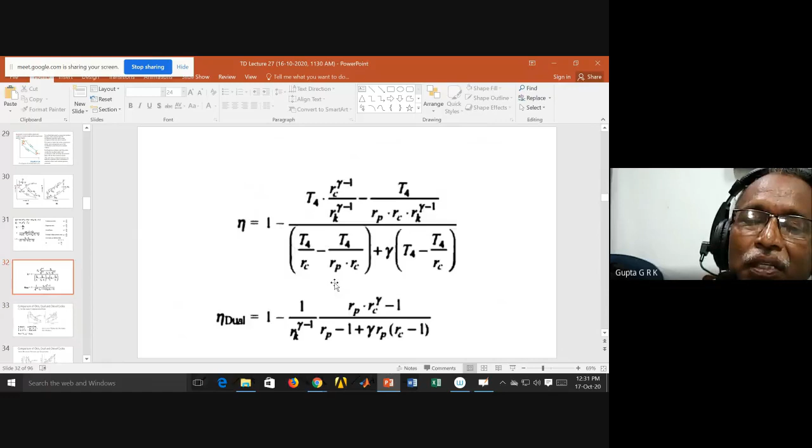This is the way you have to go about the diesel cycle problem. And the dual cycle, we have discussed the PV diagram and TS diagram, and the derivations at compression ratio, expansion ratio, cutoff ratio, pressure ratio, and you can get the expression for efficiency here. Comparison of Otto, diesel, and dual cycles is also drawn: for the same compression ratio we have this, and for the same maximum pressure and temperature we have this. So this is the way we have discussed, and you should be able to solve the problems with the instructions I have given.

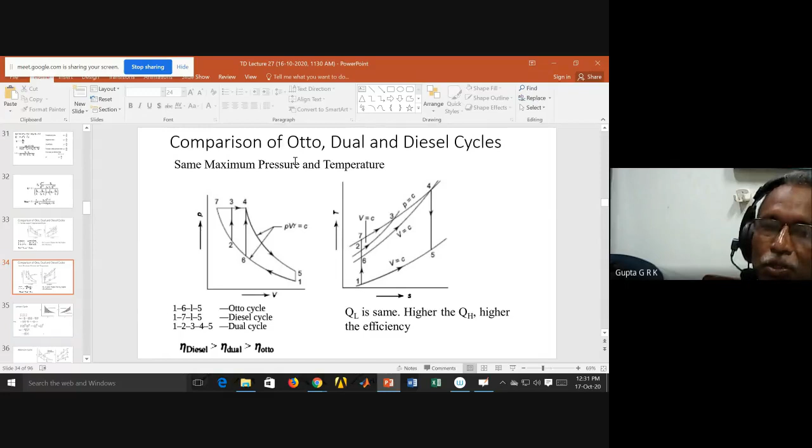And so we'll go to the story, a nice story. The story's name is Shipwrecked.

There was a voyaging ship that was wrecked during a storm at sea, and only two of the men on it were able to swim to a small desert-like island, completely deserted. Nobody else was there, only these two people. The two survivors, not knowing what else to do, agreed that they had no other resource but to pray to God. There is nothing else we can do.

However, to find out whose prayer was more powerful, they agreed to divide the territory between them. You pray on the other side, I pray on this side, and we will see whose prayers will be answered by God. And they stayed on opposite sides of the island.

The first thing they prayed for was food. The next morning, the first man saw a fruit-bearing tree on his side of the island and was able to eat its fruit. The other man's parcel of land remained completely barren; he didn't get anything. After a week, the first man was lonely and decided to pray for a wife. The next day, another ship was wrecked, and the only survivor was a woman who swam to his side of the land. On the other side, there was nothing.

Soon, the first man prayed for a house, clothes, and more food, and the next day, like magic, all of those were given to him. However, the second man still had nothing to himself. Finally, the first man prayed for a ship so that he and his wife could leave the island and stay happily in the cities. In the morning, he found a ship docked at his side of the island. The first man boarded the ship with his wife and decided to leave the second man on the island, considering him unworthy to receive God's blessings since none of his prayers had been answered.